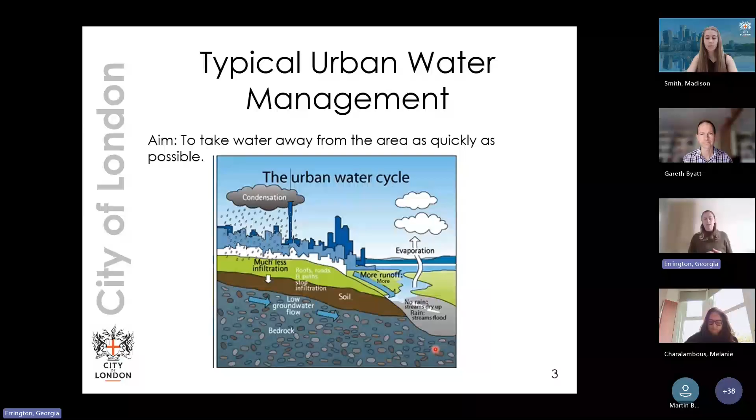And what that causes is much less water being able to infiltrate into the ground, and effectively a lot more runoff. So the surface water hits the ground and is running off very quickly. So in terms of water management within an urban area, we tend to aim to try and take that water away from the area as quickly as possible.

And this is through four key ways. We have conveying, which is how we transport the surface water; infiltrating, which is how we allow the water to soak into the ground; attenuating, which is providing areas to store water; and then the evapotranspiration, which is the vegetation. All of that is trying to slow that water process down.

There's a whole host of ways that SUDS can be done, and really it's important to show that everyone has a part to play in doing this. This infographic shows that there could be SUDS within a housing development, an office development, in car parks, in all sorts of places. But one key note on there, which is relevant to this presentation, is around the civic street, which is effectively our highway, like roads and pavements.

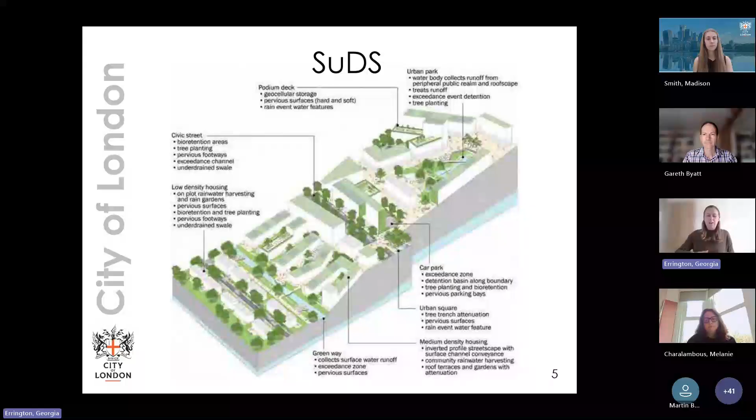And there's key techniques and types of SUDs that we tend to implement in these locations. Melanie will be showcasing some case studies from the City of London, specifically around rain gardens and things like that. So I guess, why is this important?

In terms of flash flooding, there's a threshold of hourly rainfall exceeding 30 millimetres per hour, which triggers the flash flood alerts you see on weather forecasts. That will be met twice as often by 2070 than it was in 1990. And we've also got more river flooding becoming common, which is really important, especially for the City of London and London itself with the Thames nearby.

I'm focusing on summer 2021 to showcase how these climate change effects are already being felt. But what I could have done is probably just shown a snippet of news articles from the past few weeks where the UK has been severely hit by flooding. There's been a lot of severe flood weather warnings, also warning of danger to life. So I think it's a case that speaks for itself - it's quite exemplary that we are feeling these effects now.

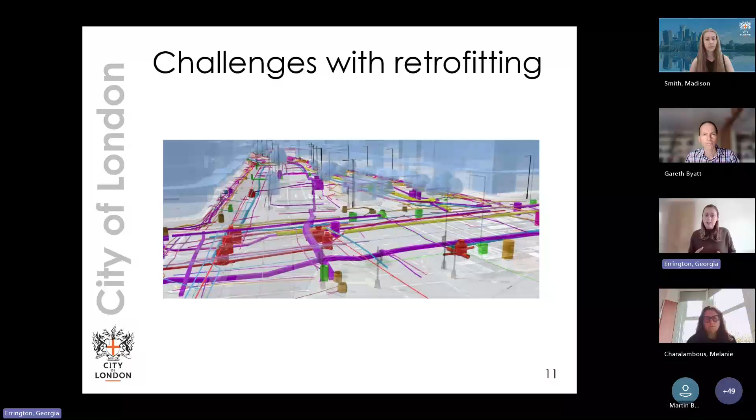This is just an image from an American case study, but what it shows is underground infrastructure of utilities. There's a whole host of utilities underneath the ground. Not only that, we also have basements, we have London Underground. So there are so many challenges trying to locate spaces where SUDs can go. But when we do find them, coming back to the 4 pillars, ensuring that the design is done to a high quality is really important.

So I'll hand over now to Melanie, who will showcase some of these City of London SUDs schemes. Thanks, Georgia.

So I've just got a few slides to share with you of some examples of schemes we've been delivering in the city. I think before I go through them, it's important to point out we haven't been doing it very long in the city. It's quite new for us, and we're kind of catching up with some other London boroughs that are ahead of us.

It was also a bit of a battle to get the whole SUDs agenda and climate action agenda through and better understood by members and officers. So we had to overcome quite a few barriers, but we do now have our adopted climate action strategy from 2020, and a key deliverable from that is our Cool Streets and Greening programme.

So the projects that I'm going to show you today are part of that programme. It's been going now for 4 years, we're in our 4th phase, and we've just got approval for a 5th phase because it's actually been really successful, and surprisingly so. We didn't expect to have so much success, and also buy-in from members and from occupiers, residents and office workers, because everyone loves greening.

Next up, I'm pleased to introduce Gareth Byatt from Risk Insight Consulting. Gareth is an independent consultant working in urban resilience, risk and resilience for various industries and business sectors, and disaster risk. He is an ambassador for the Institute of Risk Management and regularly undertakes research work independently and with academic institutes across the world. Over to you, Gareth.

Bear with me just a second. Just needed to turn my microphone on. Can everyone hear me okay? Great, okay, thanks very much.

Thanks, Maddie, and very interesting to see those examples in the city that Melanie and Georgia outlined. Perhaps I'll draw a few links to those through this session here, which is looking at examples of urban flood management from other parts of the world, and a few thoughts on business continuity as well. So those are the two main points to this particular presentation.

As you mentioned, Maddie, thanks for outlining a very brief overview of what I do. I undertake work in the urban environment, including liaising with different organisations, large and small, on cities, towns, developments and the like. I'm also a researcher into disaster risk reduction and how to avoid disasters, in particular those that are of a flood-related nature. I also carry out activities in the private sector, different industries, businesses and the like. Hopefully the second part of my presentation will provide a few useful thoughts for people around business continuity management, which is part of business resilience and risk management.

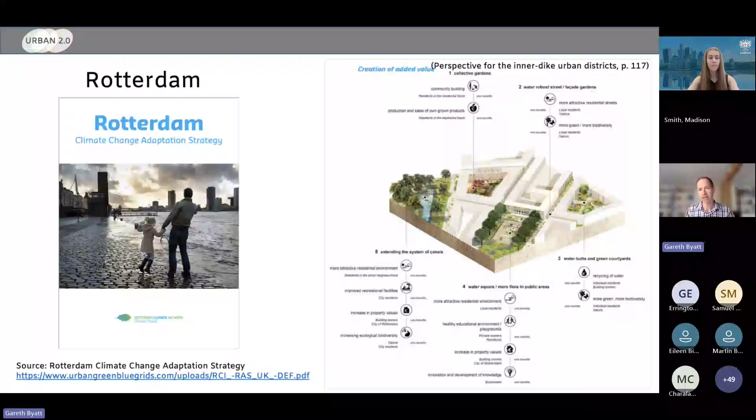Another example from Rotterdam is a square that actually changes purpose - Benthemplein. It harnesses rainwater, with a structure of basins to collect it. Depending on how much rainwater falls during intense rainfall, it fills up and creates a feature. When there isn't much rainfall, in a dry period, the area becomes a social space. It's a dynamic type of infrastructure being used there.

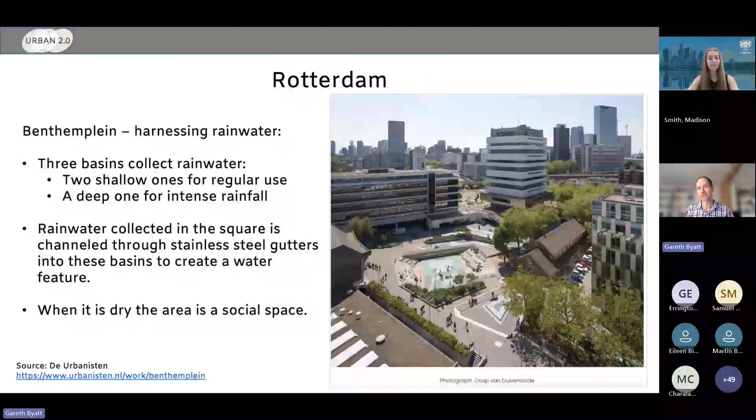Quite interesting. Moving further afield to Singapore, with a couple of other Asian examples coming up. Singapore is in the tropics, and at certain times of year they have particularly heavy rainfall. The Singapore Public Utilities Board, the PUB, has a strategy to manage that rainfall properly with their drainage systems, including the right building regulations so any new development or refurbishment has those measures in place.

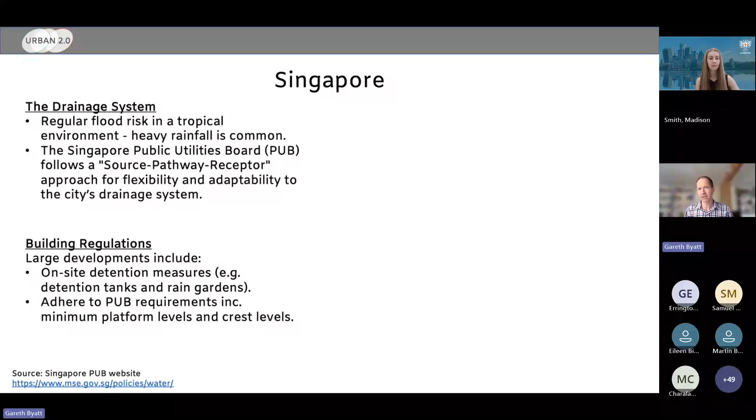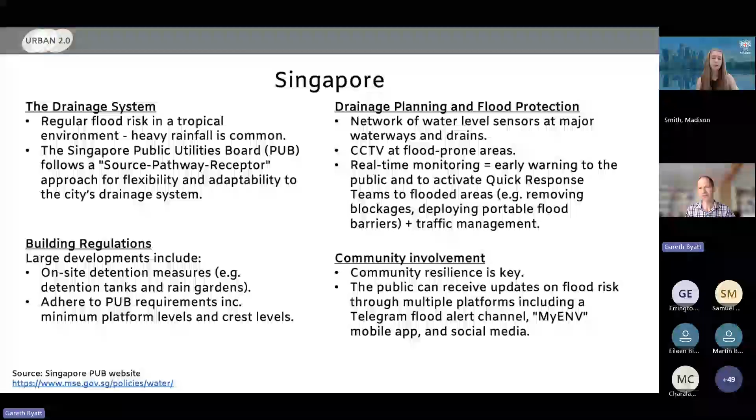The city's also got regulations to help manage that. There's a lot of use of appropriate technology for drainage planning and flood protection - different types of sensors, CCTV used for monitoring, and teams activated to support things during heavy rainfall periods. Crucially, there's also community involvement, making sure the public is kept aware and can interact with things, knowing when there are risks of severe flooding occurring. Just a couple of examples here, photos that I've taken.

The one on the left is a simple drainage channel, and you can see a few little leaves there. The whole process of maintenance, which was mentioned earlier in terms of factoring that into costs, the maintenance of the drainage network is certainly very well kept up in Singapore.

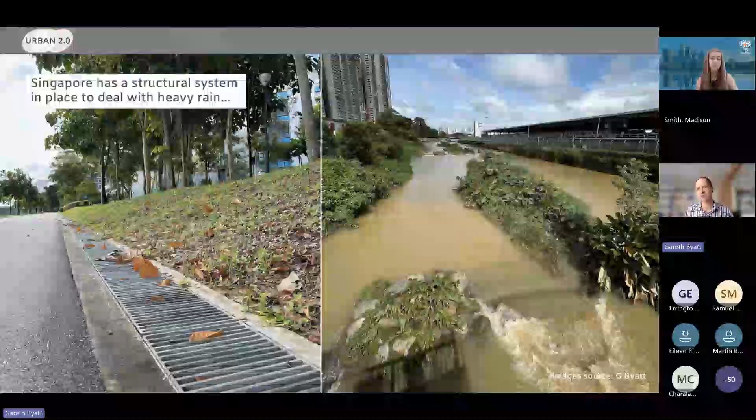On the right-hand side, this is an example of a flood channel after a very intense period of rain. You can see some of the natural solutions in there to help break up the water and the discharge. To the left is a large housing development, and to the right is part of the transport infrastructure. So again, it's a way of linking things together.

In Singapore, there's an example of a particular park, Bishan Ang Mo Kio Park, that used to be a large stormwater channel. A few years ago, it was completely changed into a large nature-based solution. Whilst I appreciate we can't undertake these kinds of large nature-based solutions everywhere, context is always key. This has proven to be very successful on a number of fronts.

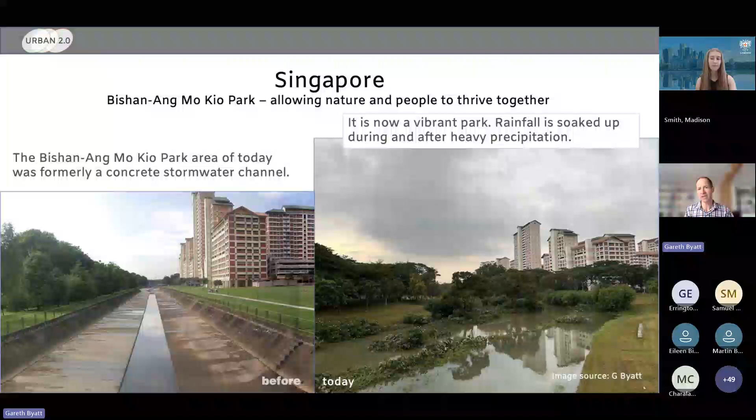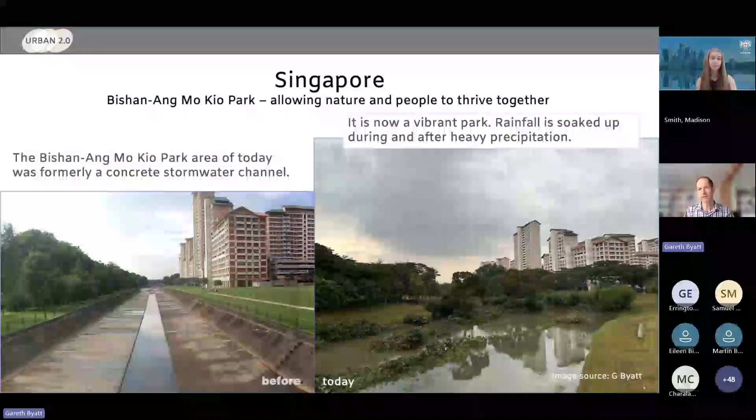You can imagine the biodiversity that is there. It's a parkland area, and it's also a little bit cooler than this particular micro area was before, thanks to this type of area. The photo you're seeing is after an intense period of rain, where natural flooding is in place. So it's a larger scale version in many ways of the kind of SUDS initiatives we saw just now.

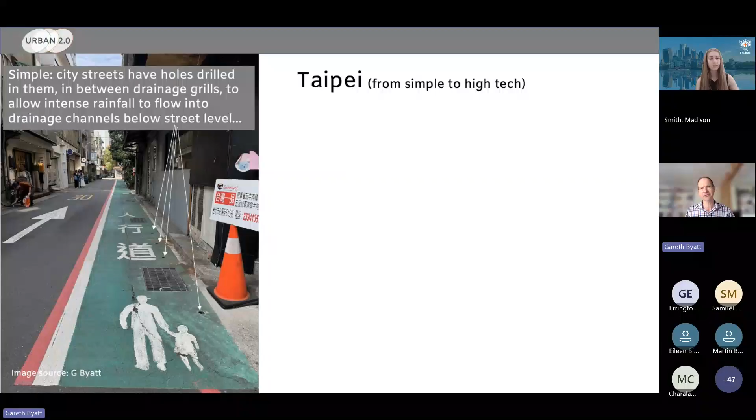Smaller version here from Taipei, but still effective - the streets as well as the drainage channels. Taipei is a city that can receive heavy amounts of rainfall sometimes, but they also have these small circular or conical drilled parts along the streets to help manage the rainfall, particularly when it's very intense. They also have some very high-tech things taking place in Taipei.

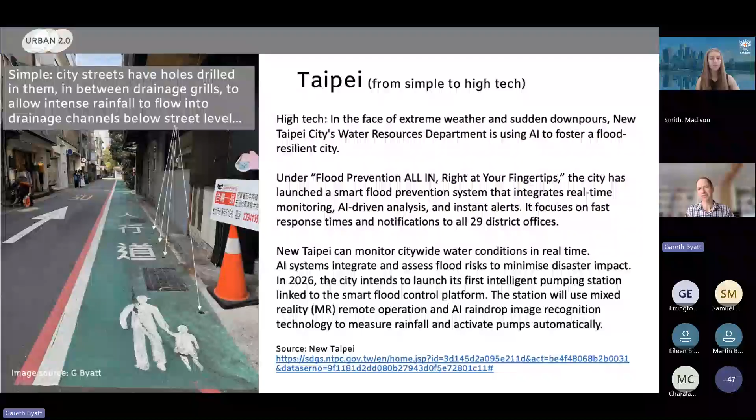As an example of that, there's an AI solution being worked on to improve the city's resilience to flood management. So an example here from Taipei in Taiwan of something really quite simple, and also some more advanced flood management taking place.

One more example from East Asia that people may find of interest - if you have the opportunity to visit the very large city of Tokyo. Tokyo itself has a resilience project, which includes how it manages its water risks and flooding risks. Part of this very large project is what's nicknamed the Underground Cathedral, the Metropolitan Area Outer Underground Discharge Channel.

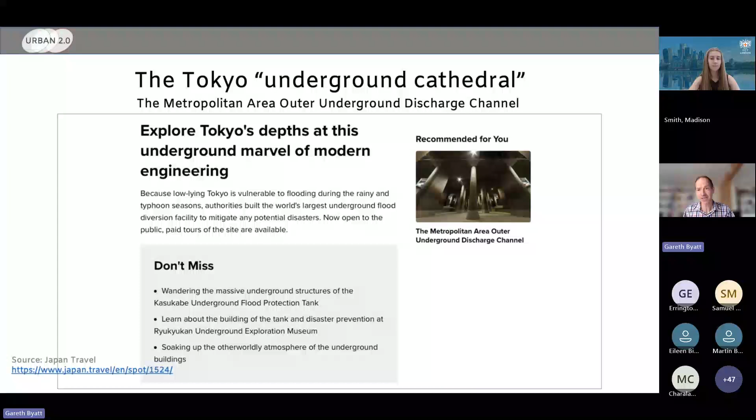You can actually visit this particular site. So if anyone happens to be visiting Tokyo at some point in time, if this might be of interest, then you might be able to have a tour of it.

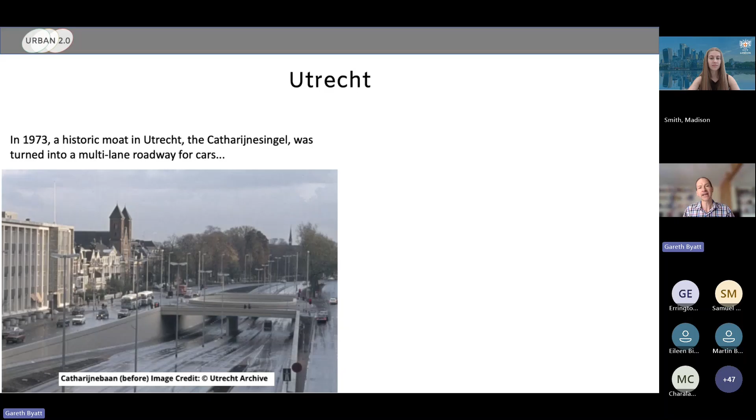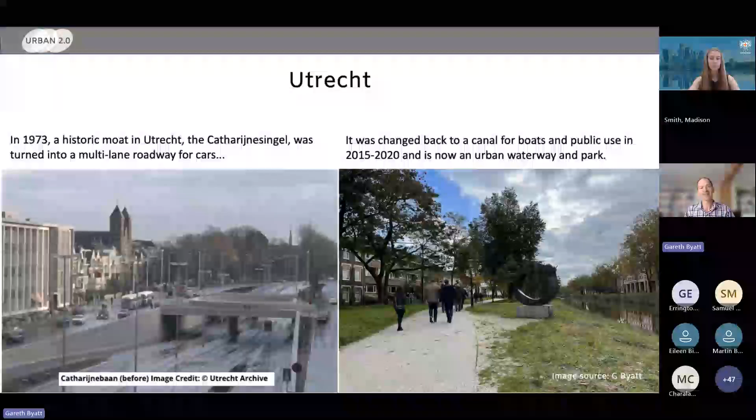I'm going to circle back to the Netherlands again, just to give an example of in Utrecht, a motorway that used to be a canal, and in the 70s was turned into a motorway, then transformed again back into an urban waterway. I think it's an example of going full circle - from using waterways for commerce and business, transforming it into a different type of infrastructure deemed appropriate at the time, and then turning it back into a water feature as it exists today. So there are just a few examples for you from cities around the world.

Now I've just got a few thoughts on business continuity management for people.

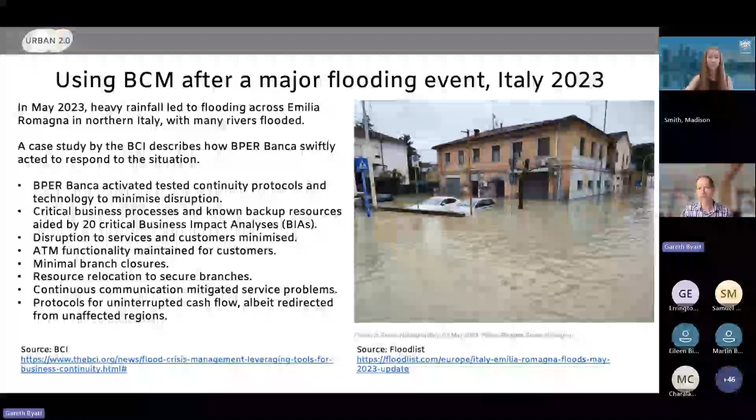Thanks, Gareth. Got some good travel tips from that presentation and really enjoyed seeing the mix of traditional and modern solutions - I think that's quite reflective of what London aims to do. Please put any questions in the chat box. We've got two already, and I'll throw them at Georgia and Melanie.

Can you first quickly explain what the difference is between infiltration beds and crates when it comes to SUDS? I don't mind taking that one.

One of the main differences between an infiltration, say a rain garden, and a crate system - infiltration tends to use gravel, which has voids in it that allow the water to have some storage capacity, but it's effectively about infiltrating the water into the ground. Whereas crates have a lot more storage capacity, and as Melanie mentioned in one of the case studies, it attenuates, so it stores water - it has a lot more capacity to do so. One key challenge is crates can't go everywhere due to underground infrastructure, so if there are too many utilities, crates can be quite difficult to implement. So there's definitely a place for both approaches to be used in SUDS.